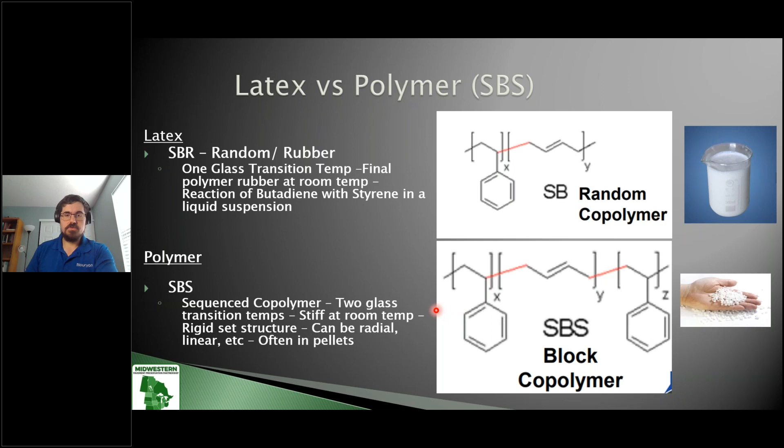But the two different polymer systems do have the same main building blocks. In the polymer-based system, the difference is the styrene-butadiene-styrene is in some sort of a sequenced rotation. While this comes out as a rubbery aspect in final situations and is a liquid when we're processing it, this comes out into more of a solid, styrofoamy little pellet with actually two different glass transition temperatures. So these are different products.

But first, talking just at a high level, how do we get SBS polymer, this solid little pellet, into asphalt in the first place? And this applies not just to asphalt emulsion for chip seal, this also applies to hot mix binders and situations. So we've got this solid material here, we've got asphalt binder.

Theoretically, given enough time, it will be digested into the asphalt, but we really need typically to use a mill that kind of grinds that polymer into the asphalt binder to get to a situation that you like. So these are two slides just from a mill manufacturer.

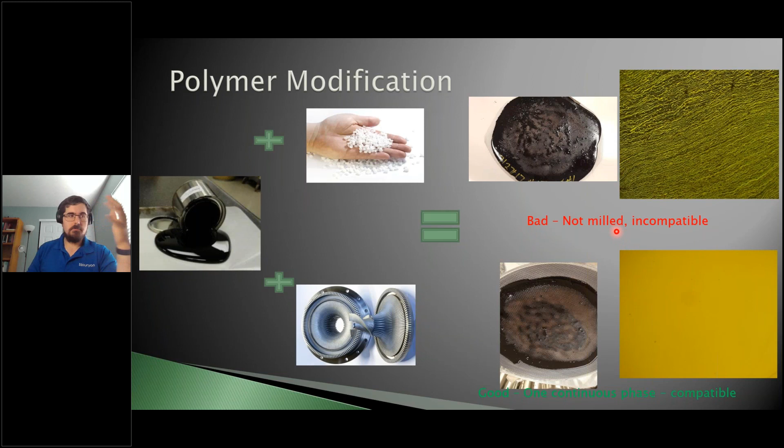This is a common screening tool, just to put the material through a screen. And you're seeing chunks there, and you're seeing a situation here where it's not fully dispersed into one phase. So this is really what we're looking for - we're looking for that polymer to be fully dispersed within that asphalt, so it's one continuous phase of polymer linked with asphalt binder to give you one solid system.

So just touching a little bit on what asphalt emulsions are and how they're produced. A similar mill kind of concept, but you take asphalt binder or bitumen, according to this, and you mix it with some kind of soap solution. Now that soap solution would have an emulsifier, which is something we work in, maybe an acid, maybe a base, maybe some other chemistries. Those all come in line and get emulsified. Those asphalts get turned into small droplets, and that gets turned into an asphalt emulsion.

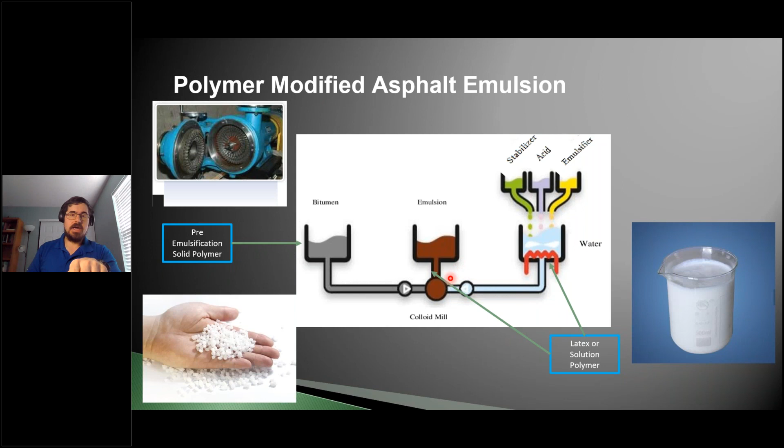And in the case of pre-modified or SBS modified, nothing really changes on the general schematic of how that's made - this asphalt binder is just a different system. But in the case of latex modification of the finished emulsion, this is another liquid, a water-based polymer dispersed system. So this can be introduced in a number of different locations within the system, but it is compatible with water. It's typically introduced into the soap line or even into the soap tank, and it mixes well in and really doesn't add a ton of changes to temperatures and everything like that, like we'll get into.

So what does it look like when we have this latex modified system? Well, in the end, it's a mix of two different dispersions. You have these asphalt particles that were milled up by that asphalt emulsion mill, and then you have these latex SBR particles - those styrenes and butadienes in here. And these are two different systems mixed together.

Now there's some different methods on how you can do that. You can do it in the soap, like I said, or you can co-mill it in various different ways, or you can post-add the latex and mix it all together. There's all kinds of different polymers - SBR, as we touched on in the beginning, is the most common. Natural latex existed at some point, and neoprenes are out there too.

Generally speaking, and we'll get into this a little bit more, you're going to have a lower asphalt viscosity compared to SBS, whereas SBS is going to increase the viscosity of your asphalt in general, and the latex will also have an impact on the rheological properties of the finished emulsion. But what's most important to understand here: the polymers we're talking about, these styrene butadiene polymers, are in the water phase, not the oil phase. These are two separate systems combined together, and then you get your end properties once everything breaks and you get your final chip seal.

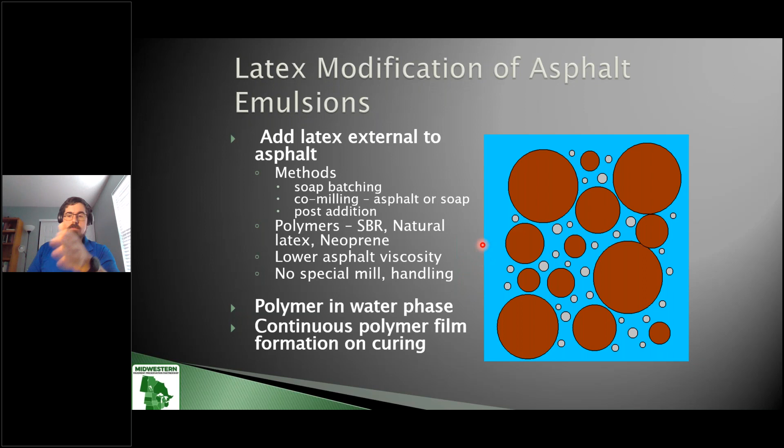On the polymer modified system, these are just the same as any other asphalt emulsion system. You've got all the droplets of asphalt, but within those you have these links of styrene butadiene styrene copolymers within the asphalt droplets themselves. So the asphalt binder was pre-modified with polymer, so the polymer exists in the oil phase, or the asphalt phase.

Due to this, you get a higher viscosity or shear resistance going into the asphalt emulsion mill. This binder becomes more difficult to emulsify compared to a standard binder used with the latex system. Not always, but sometimes this requires you to exceed the boiling point to make a high quality asphalt emulsion with these systems. That could lead to an exit temperature above 100 degrees and the need to use heat exchangers and back pressure and everything like that.

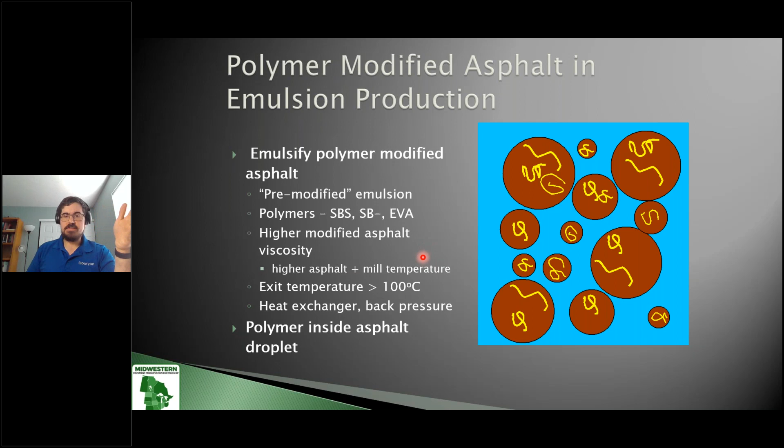So this adds a complication. The overall schematic is the same, but it adds a complication in terms of it being a more difficult material to mill. Whereas if you introduce latex, the material that you're milling when it comes to asphalt is the same as it would be for a CRS2 or any standard emulsion.

There are some different options on how you add the latex to the asphalt emulsion system. This is probably the most common that I've seen, at least. You've got your typical setup here, and note these temperatures - we're not going to exceed the boiling point, we're just making a regular emulsion here. You've got your soap solution with your emulsifier and everything.

You can batch the latex into the soap tank or add the latex in line to the mill. It's very common to see setups where you have either a tote of latex or a tank of latex, and that's just going in line, maybe through a static mixer, and then it goes to the mill. Basically nothing else changes - you've just got that system of polymers dispersed within your asphalt emulsion when it finishes.

One thing to note is latex does have some salt in the system. So if you made a CRS2 or whatever regular version, changed nothing else, and added latex to the system, your viscosity will go down slightly, but it actually becomes more stabilized. The reason for that is something back in high school chemistry called osmosis - the water will flow based on salt levels, so you kind of shrivel up your asphalt particles a little bit because the water flows out of them.

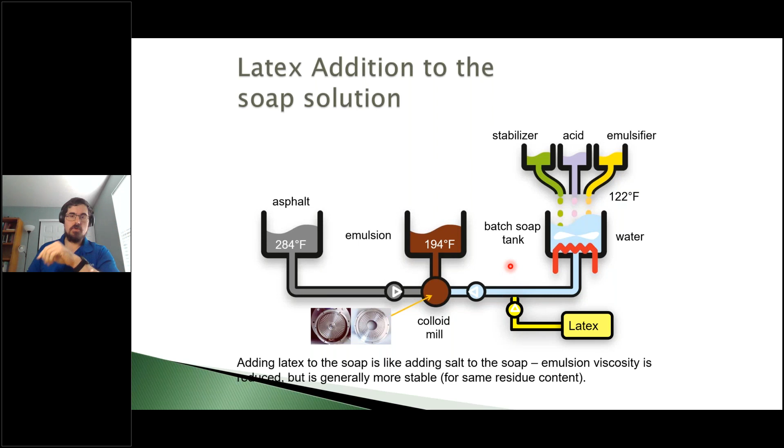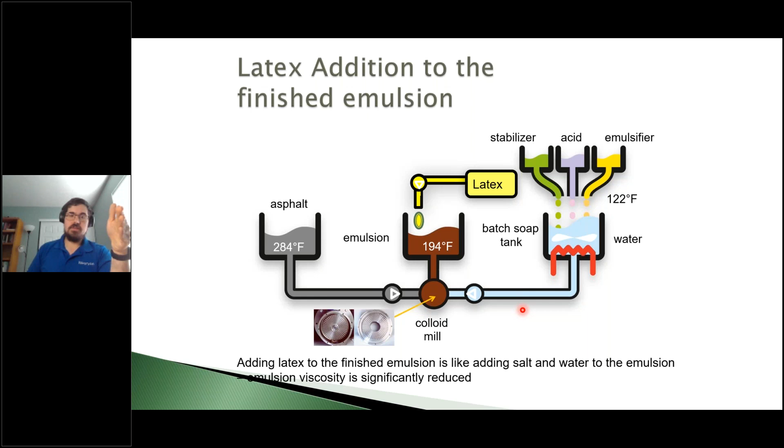Another option - and if you ask Arlis about this, he'll strongly encourage against it, but it does happen - is to post-add the latex to the finished emulsion. You make a finished emulsion, and either in your batch tank or finished tank, you put in some latex. The problem with this, and why this would never be done in a chip seal application, is doing it this way will greatly reduce your viscosity, because that osmosis effect will be more pronounced and more localized as you're able to mix that latex in. You'll lose a ton of viscosity in that situation, and if anybody knows about chip seal, viscosity is very important.

And then the final option is to actually inject the latex into the asphalt line. What that does, and what people have found, is that it will significantly increase your emulsion viscosity. The reason for that is it kind of encapsulates some of that salt water, so it actually swells the asphalt particles slightly to increase your viscosity.

Now, one thing to make sure we understand is the polymers themselves are not going into the asphalt droplets. The polymer is still a separate system - we've still got two different systems. You're not accomplishing that, but you are accomplishing a change in the rheological properties.

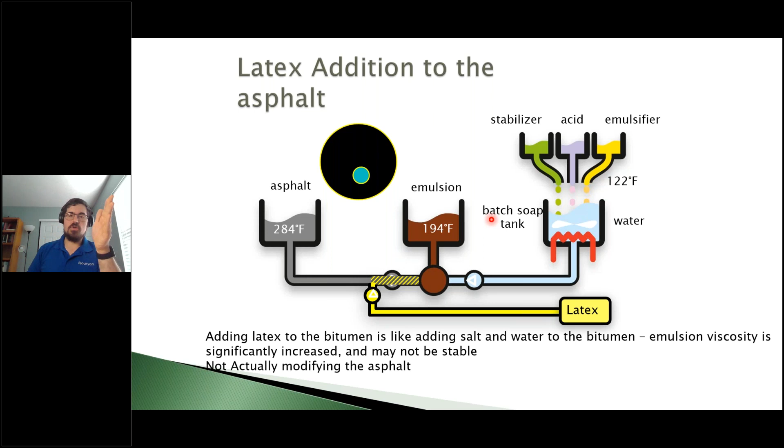So what some people will do is have one line of latex and split it - part into the asphalt line and part into the soap line - as a way to adjust asphalt emulsion viscosity without having to start playing around with emulsifier content or asphalt content. It's an easier lever to use to adjust viscosity, and I've used it in the past in my career. It's easier to change that because if you start changing asphalt content, you're changing your general design of the system, and if you change emulsifier content, you're changing the way everything reacts. So it's an easier way to adjust for viscosity.

So how are these systems tested?

Historically, it's always been, I started off in the lab, and you do the very high temperature asphalt emulsion distillation method. A couple of weeks ago, I actually did a similar kind of presentation in front of some real polymer scientist experts. I said, yeah, sometimes we distill it at 500 degrees Fahrenheit and their eyes got this big. And then I even said, well, sometimes we work on it, we bring it down to like 350 or 400, and they're like, that's still not great.

So some of these testing methodologies are really exceeding the temperatures that these systems ever actually see in the real world. And they're also doing some level of polymer degradation and reaction. But really, the main thing to me, even back in the beginning of my career, I'm like, well, when we do a chip seal, the road never actually gets this hot. So what are we really seeing?

But the goal with the distillation test is to make sure you have all the water out. It's actually difficult to get all the water out of an asphalt emulsion. You can get the initial water out, but some gets encapsulated in the oil. The goal is to get all the water out, all the oil out, measure the oil, and then know that all you have left of that residue is the binder. So it's kind of a way to get that done.

Now, there's been some movement to kind of improve some of those recovery methods lately. And one of those was the vacuum kind of distillation. So you can lower the temperature and use a vacuum to kind of improve the way that performs, but it's kind of cumbersome. You've got to get a whole new piece of equipment, you've got to have something else to work with, and who wants to deal with that?

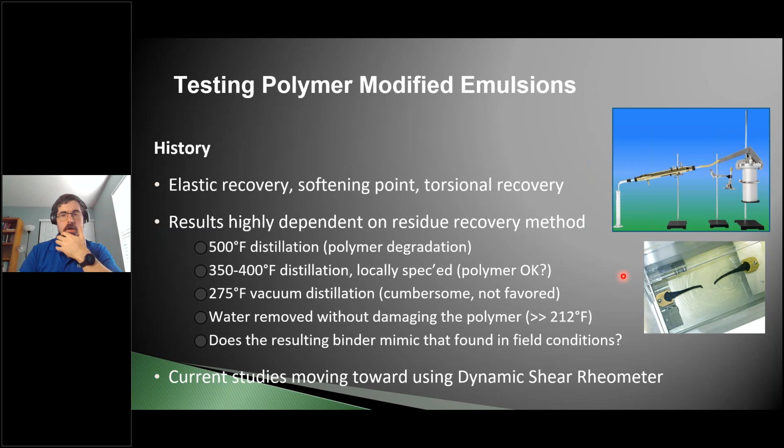And then you have typical pen, softening point, all that kind of stuff too. This is kind of representing where things are moving in the future. So you can just Google NCHRP 9-63. It's been going on for quite a while.

One piece of that is to move to a more realistic residue curing method. And then the other is to start using the dynamic shear rheometer, get some numbers, and they're working to correlate that back to actual field values.

Because one thing I wanted to touch on in the first slide - chip seal is very important to understand, we're talking in the pavement preservation group. This is a preservation treatment. This is not a structural treatment. It's more along the lines of a membrane.

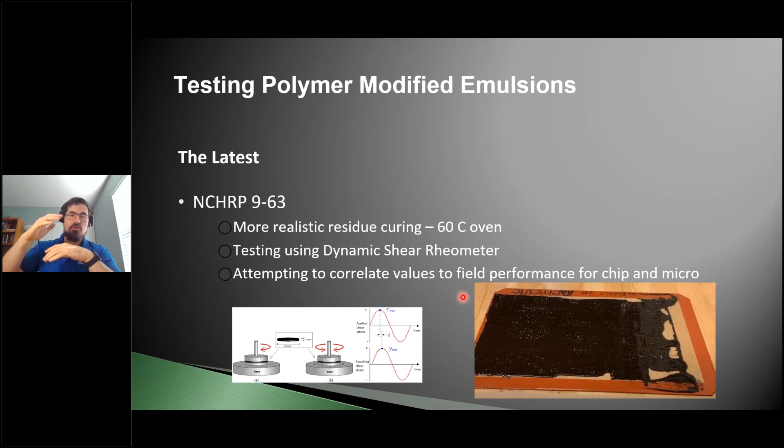And some of this testing historically has been designed more for your real load bearing capacity increasing hot mix. So we've got to be careful on how we analyze these systems. So what does that residue actually look like?

There is a difference in how the residue ends up looking between a polymer modified asphalt system and a latex system. This is how it would look theoretically, just neat asphalt - you just got asphalt rheology. In a latex system, it actually is a membrane of polymer between the asphalt particles. And then in an SBS system, theoretically it coalesces back together and you get back the SBS properties.

Now, what do these polymers do? They improve low temperature fatigue. I think everybody in DOTs knows what polymers do theoretically - they reduce rutting, they improve early strength. But really for chip seal, maybe low temperature fatigue, but we're not really talking about rutting. It's a membrane.

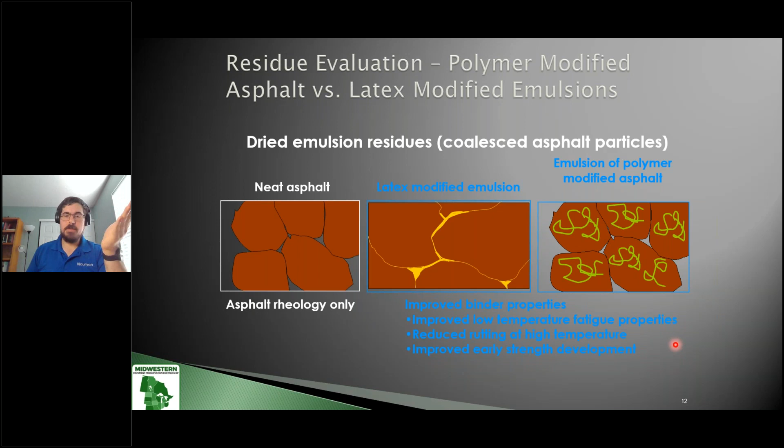So what do polymers do for us in terms of chip seal? I would say the biggest, at least in my career being field QC and different things like that, the biggest failure modality of chip seals is stone loss. And it's been proven, and Arlis is going to get into some of this, that polymers give you that nice little stretch, that additional adhesion, and reduce - assuming your mix design is correct and your application rates are correct - that stone loss.

So we don't get things like this, where all the stone is off and we've just got a slick asphalt surface. The goal is to have some stone and then have that nice membrane to preserve everything underneath it.

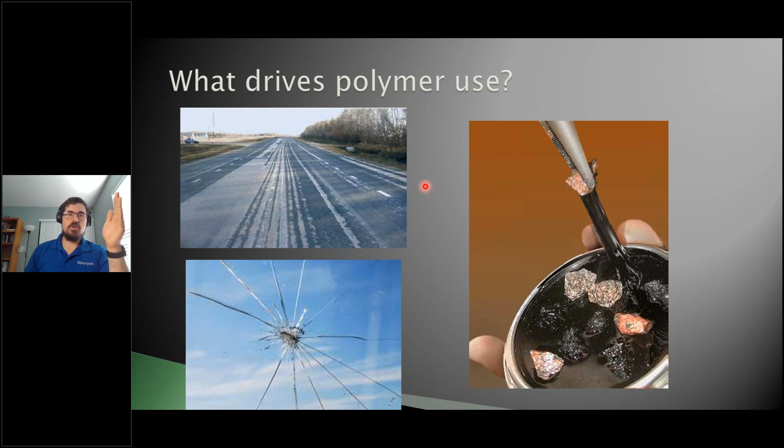There's one way we test that, called the sweep test, ASTM D7000. We take some roofing felt, put some asphalt emulsion or whatever the binding agent is on there, put an appropriate application of rocks on there, and cure it for some amount of time.

This can be used for two different things. You can cure it for different amounts of time and see how it's performing in different curing environments, or you can fully cure it and see how it ends up performing in the end.

So what are you testing with that? You're testing the adhesion. There's some chemistry going into that, the reactivity, how this system clings to the aggregate, the overall durability of the system, and the binder property.

You take this specimen - it's actually like a mixer that goes in a planetary motion, used a lot in micro too. You put a brush over top of it with water, and it rotates around so you see how much stone you lose by beating it up. The less stone you lose, the better your system is.

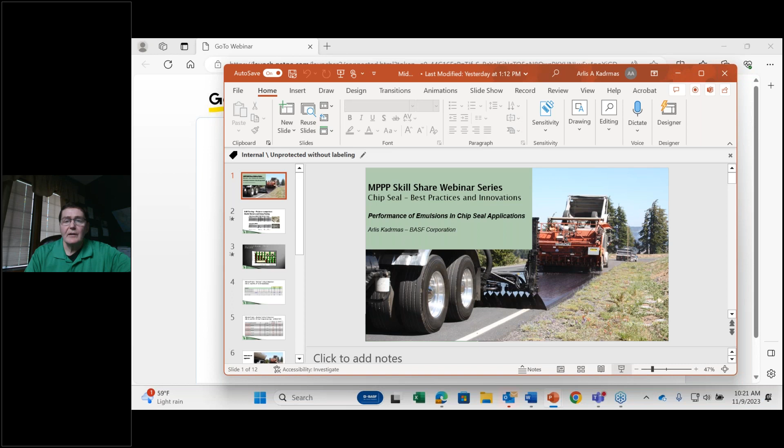I think Aaron introduced the processing and how latex modified versus polymer modified emulsions are made. I want to get into a couple comparisons showing whether you run an SBS modified emulsion as a chip seal or an SBR modified emulsion chip seal - they can both perform very well, be very comparable.

I've got a little bit of data that expands on what Aaron mentioned - just one project done as a trial that compared a latex modified chip seal versus a polymer modified emulsion based chip seal.

To start, I wanted to expand on what Aaron said about elastic recovery. It's one of the tests a lot of agencies use to define whether a polymer's in the system. In this particular elastic recovery test, polymer A happens to be a latex modified system, and polymer B happens to be an SBS, basically a polymer modified asphalt emulsion. When you look at it, one had a little better elastic recovery.

When you look at the sweep testing that Aaron focused on a bit, and showing those results, you can see that even though polymer A had a lower elastic recovery, it held the chips a little bit better with this particular chip and design than polymer B after 2 hours.

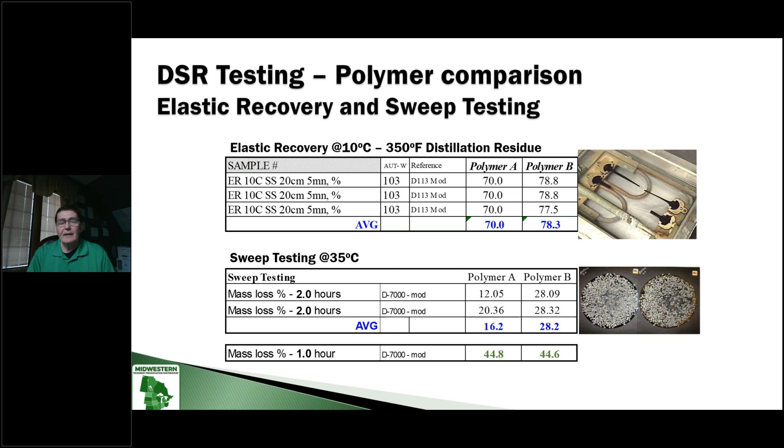And this is just showing how the sweep test can kind of show you how these systems work.

My next slide, I want to get into a comparison using a latex modified system with SBR with 8 different aggregates. This data was done by Paragon Technical Services, so I appreciate them for this information. What this is basically showing is how good polymers can make a system and make it perform better.

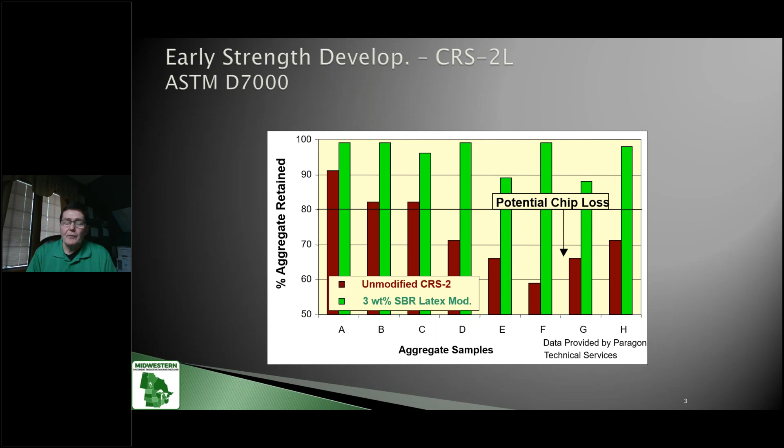Usually on a sweep test, you want to see above 80% chips retained. The first 3 aggregates without polymer modification were slightly above that. Aggregate A actually did fairly well, but all of them with the addition of polymers helped out systems that weren't very good. Samples D through G had right at 70 or so percent retained, but when you added polymers to the system, this just shows, as the slide Aaron showed with the chip loss, that you can get great performance out of these materials by adding polymers to the system.

I want to expand again. This happened to be data from a project where they did both a latex modified and a polymer modified system. Just shows you...

Oops. I think I lost my screen. We're still seeing you fine. Okay. Sorry, I lost my view of the slide.

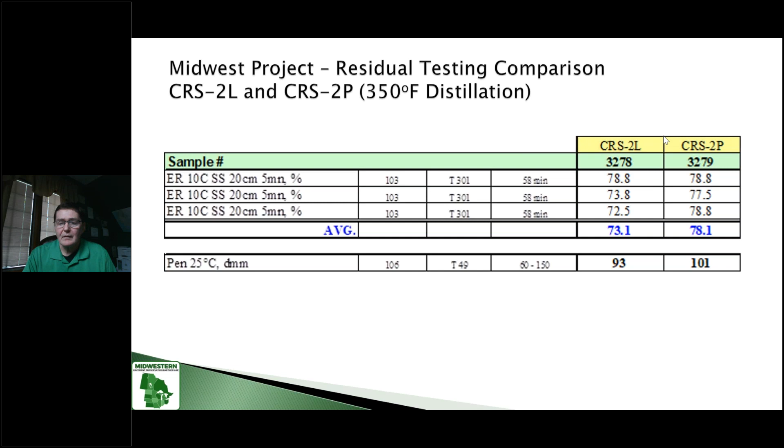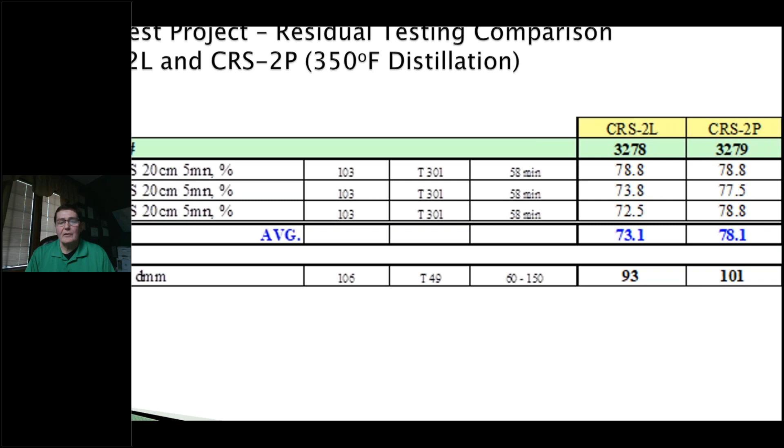Okay, thank you. The elastic recovery on here, this happens to be #2, and you can see that they're very similar results, whether you used a latex modified system or an SBS polymer modified system.

Expanding a little on what Aaron said, how things are moving toward the low temperature evaporation procedure, this just shows the data from the same project where you can see comparable data. As far as G-star, you can see it's a little higher. Almost always the latex modified system will have a little higher phase angle when you do a low temperature evaporation.

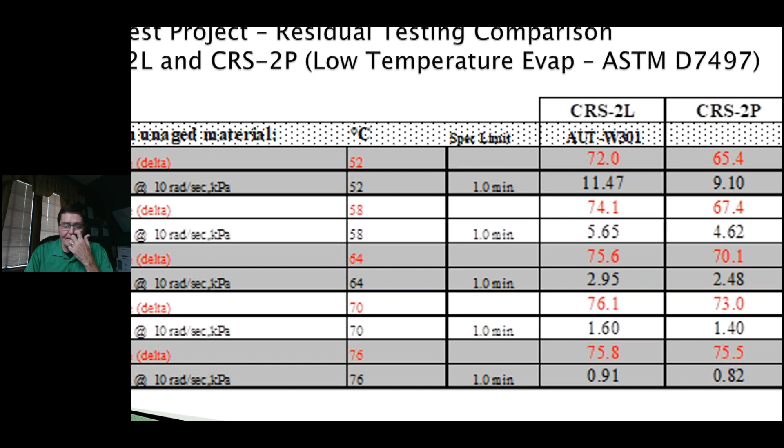That's something that is being looked at in the systems, and when it comes to trying to specify under the low temperature evaporation procedure, they're looking at a lot of different ways of trying to specify around it. But I just wanted to put this slide up there to show you that this is being done, and there is some data going into this process.

I wanted to, lastly, in the few slides I have left, show you an actual field application that was done in Crater Lake, Oregon, where this process was done with both a latex modified and a polymer modified base chip seal emulsion in the field.

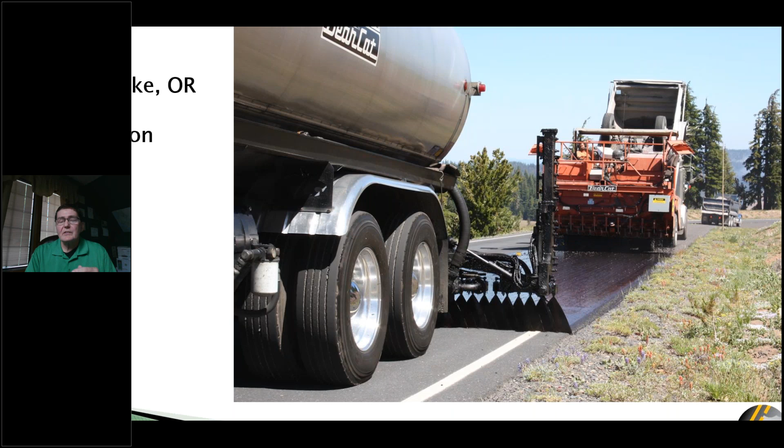This was done by Central Federal Lands, and the project was really done, the reason I've been talking about sweep tests a little bit, to focus on how good the sweep tests could be. I'll expand on that a little bit.

But just on the emulsions that were used on this project, it was obviously done many years ago, and both of these products have been performing very well. The CRS2L, the latex product, you can see some of the data on it.

They ran torsion recovery. Basically, that was kind of how that emulsion was spec'd at the time. It performed very well on that test. The CRS2P, the modified asphalt-based emulsion, had again met the specifications for the project out in the field.

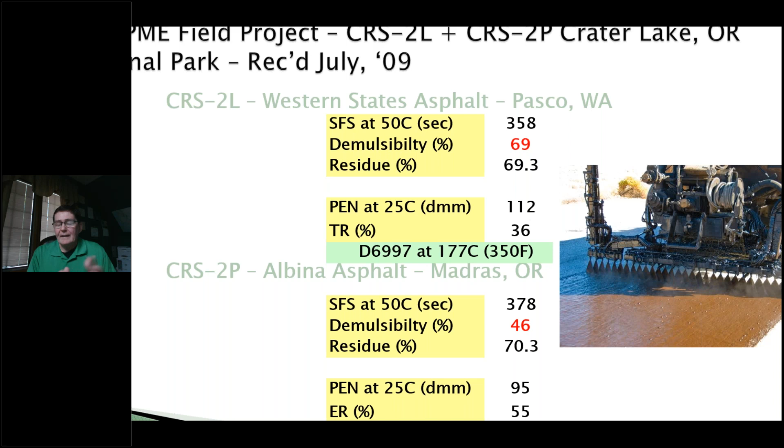And this is just, again, comparisons, expanding a little on what Aaron said. Both of them had about the same viscosity, so you can make the emulsions. The residues are about the same. So again, the emulsions can be made very similar.

Again, the project was done, and the reason this comparison was made is the sweep test was starting to really get looked at in a lot of labs, and they wanted to see whether it could be developed into a procedure that could go into some specifications. So that's basically what this slide is about. There were 4 laboratories involved in some of the analysis behind the sweep testing, just to give some data and information.

This next slide just basically shows some of those sweep test results. And on here, what you'll see is that whether it was a 2L or 2P, if you look lab by lab, the results are very similar. And that's basically what I want to focus on. The results are very similar.

The reason that the sweep test hasn't been kind of grabbed and put into specifications, you can see by this slide. A lot of suppliers are using it in a design process, and it works extremely well. But intralab, if a lab is using this particular procedure, it works very well and they get very consistent results.

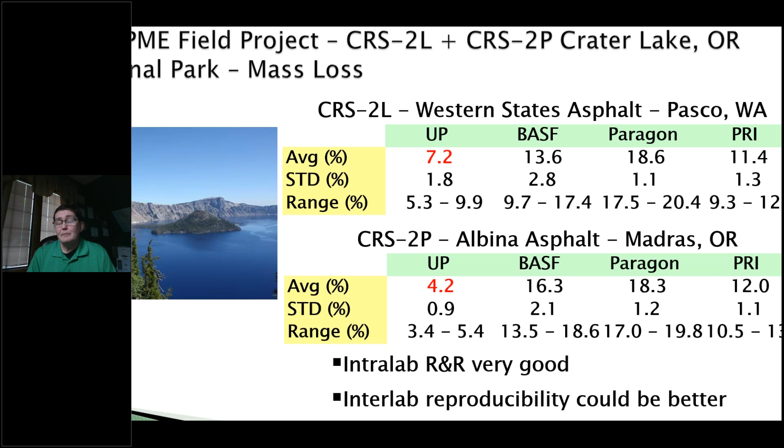But if you look at the interlab reproducibility, it's not very good. You can see the results range from about 4% up to 20%. But what this slide does show you is that the latex modified system and the polymer modified system perform very similarly if you look at the laboratory by laboratory setup.

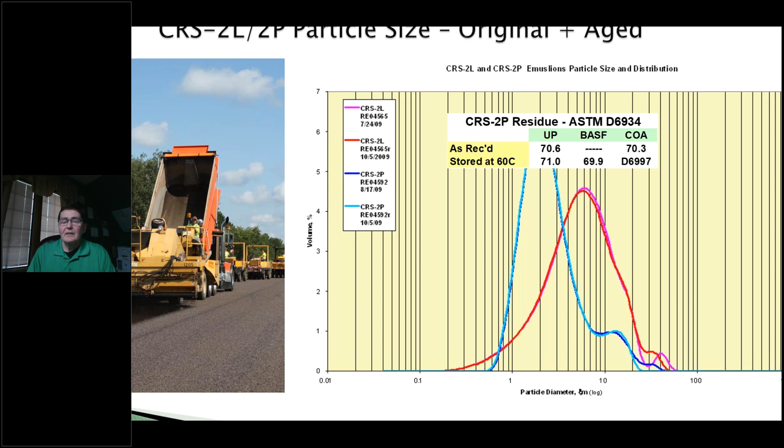This next slide, I just wanted to show you particle size and emulsion. Aaron kind of got into how the production was. Basically, both emulsions, whether latex modified or polymer modified base made into emulsion, give you stable emulsions over a period of time. These results are taken a couple weeks apart, and the particle sizes are basically right on top of one another. So this is just saying that no matter how the emulsions are produced, they're fairly stable over a couple week period of time, which is very important.

In the application itself at Crater Lake, they saw no differences in the performance between the 2L and the 2P, how it shot, how they had to roll it, to seat the aggregates. There were no differences.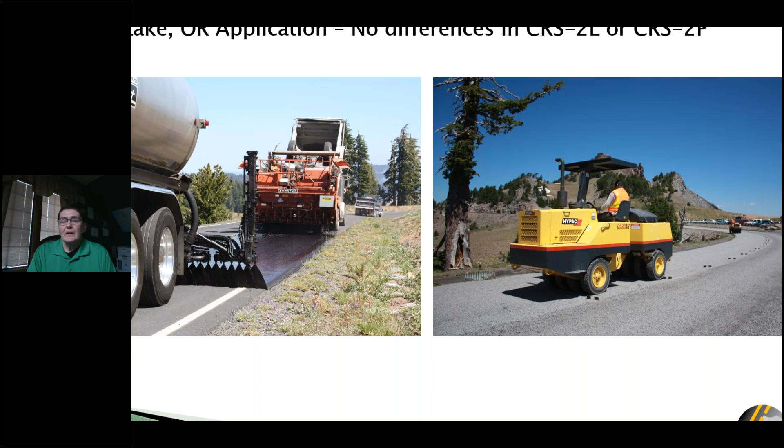And my last slide in the project evaluation, Mike Wolf was a Central Federal Lands person in charge who looked over this. They evaluated this project over a period of years, and it showed no differences in performance at all. So what I wanted to show, and pick out this particular project, is that there are many agencies that use and can spec both CRS2L and CRS2P, and they see no differences. I wanted to focus on one particular project, done in a federal agency area, that showed both of these can produce very good results.

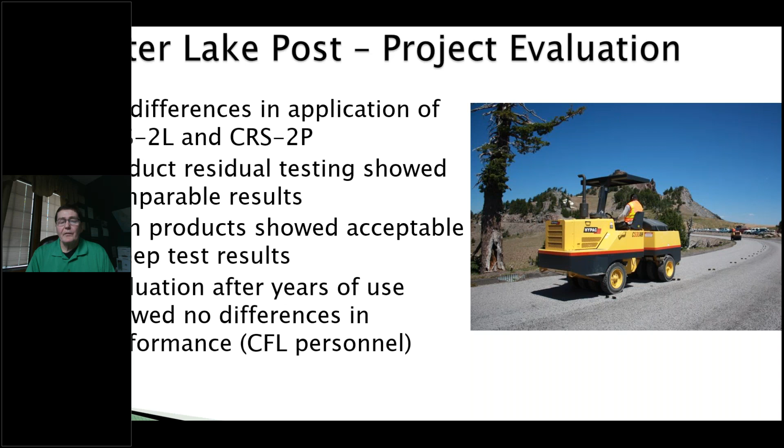So with that, I think I'll turn it back over to the next presenter.

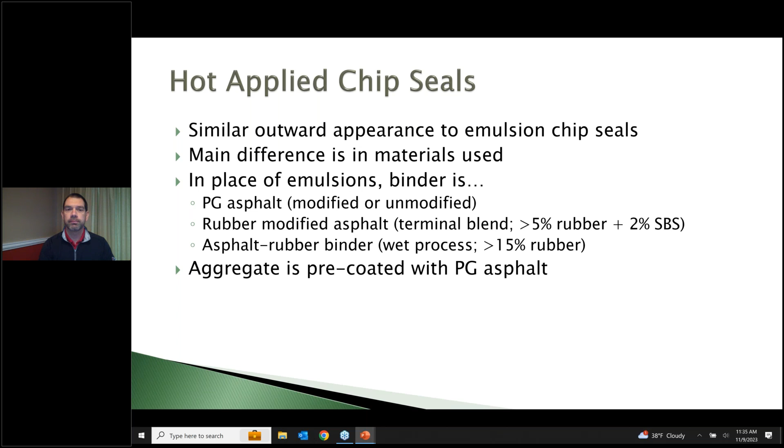As far as specifications, there is a specification out that was published in the interim AASHTO 2022 revisions, section 407, specifically related to hot applied chip seals. Also, the emulsion specifications were updated in that same revision.

For all of these, when it comes to the construction process and what's done out there, again, very similar outward appearance to what you see with the emulsion-based chip seals. So you've got a distributor spraying, you've got the chip spreader applying the aggregate. The rolling application that follows is again very similar.

The big difference when it comes to the hot applied is, in most cases, the sweeping follows immediately behind the rolling operation. A couple of reasons in that regard. The main one being, without the emulsion, without the chemistry and the curing time for the water and the evaporation, hot applied chip seals are a thermal set application.

So essentially similar to hot mix asphalt, where you have a temperature and it really is driven by the temperature. So once that binder cools and everything is there, that chip seal is set. That's what allows that immediate sweeping right behind the rolling operation.

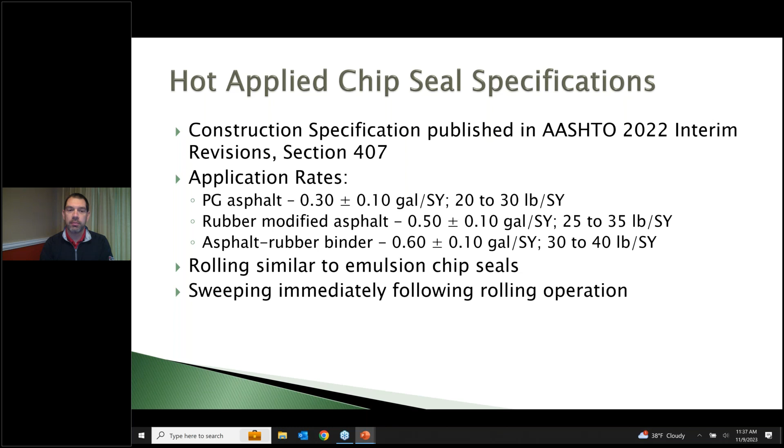So moving now from the hot apply to the high level, the rest of my presentation is really going to focus on that third option there, that third binder, the asphalt rubber binder, the wet process as it is called.

So when we talk about asphalt rubber and why you're using asphalt rubber, this actually pertains not just to chip seals, but also to why use asphalt rubber in hot mix or in other binders in general for different paving applications. You can see there are many benefits that come through, and it really relates to getting into a lot of the chemistry that's involved and what it allows in terms of increase in performance and increase in the ruggedness of that binder that's out there.

We're based up in the Northeast, do a lot of work in the Northeast in cold weather climates, and when you look at freeze thaw and flexibility and those types of issues with chip seals, the asphalt rubber really does beef up that binder and the performance of that chip.

With that, you're getting your longer service life, and as a result, your equivalent annual cost and the performance start to become more beneficial as well. It also allows you to stretch placing the treatment onto more demanding situations, higher traffic counts, and along those lines.

And then obviously with the sustainability side, on a typical mile of roadway, 24 feet wide, you're typically using around 1,350 recycled tires in that. So certainly, again, looking from a recycling standpoint, to get that rubber into the chip seal as well is certainly a great thing.

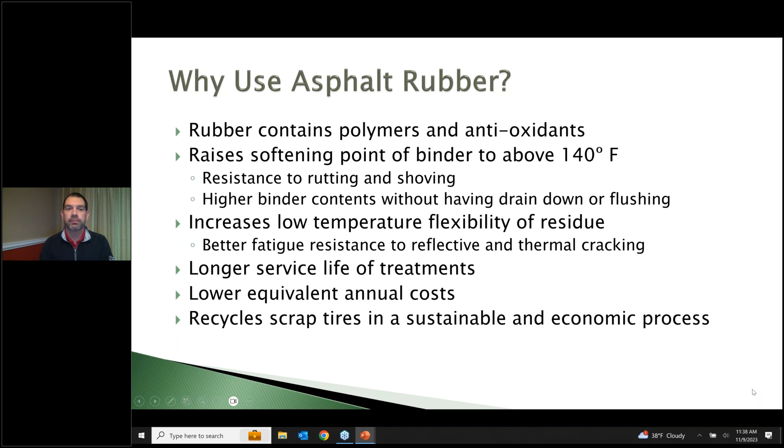Talking a bit about the specification for the binder and the wet process. As I mentioned, it is a blend of a minimum of 15% crumb rubber. This is done according to ASTM D6114. Type 2 is specifically the binder specification for this.

A couple of key points that come off of this specification, as are noted there, really in terms of that blending process. I'll show on the next slide a couple of different options in terms of the blending. But it's a mechanical blending process that is similar but a bit different from blending polymer modified asphalt, in that the asphalt rubber is actually suspended, so it doesn't get fully absorbed or brought into the asphalt, but is actually suspended, and you can actually see the particles, the fine particles, typically a 30 mesh of the crumb rubber that are suspended in there.

But there is a period of time that is required for the heating and the agitation and the reaction process so that you actually get the swelling of those particles. Without that, and without meeting those requirements, the performance really does get impacted. So it's critical to follow that process in terms of the reaction as laid out in 6114. And then from there, continuing along with that heating and agitation once it goes to a job site. So once it's blended, all of your transfer vehicles, all of your distributors all need to have that heating and agitation to allow that asphalt rubber to stay suspended within the asphalt.

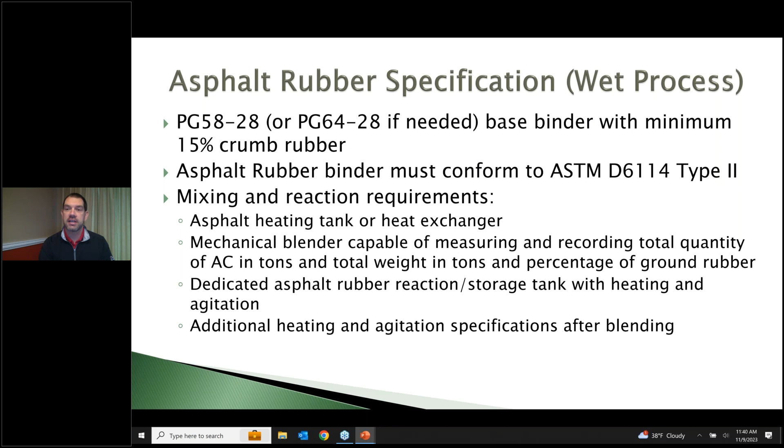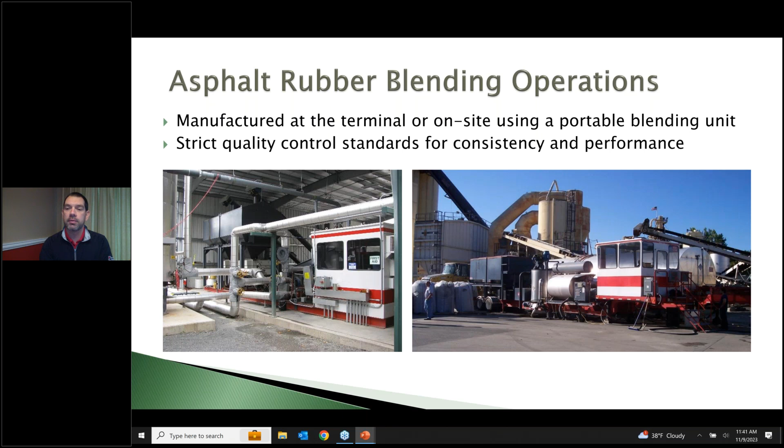Regardless of which process is used, the biggest key is going back to the specifications and that strict quality control, to make sure you're getting the performance out of the materials that you really need. Along those lines, this is a big part of the new specifications through AASHTO, when it comes to really trying to raise the level of our pavement preservation treatments and materials up to the standards of hot mix, and really bring the quality control up with that.

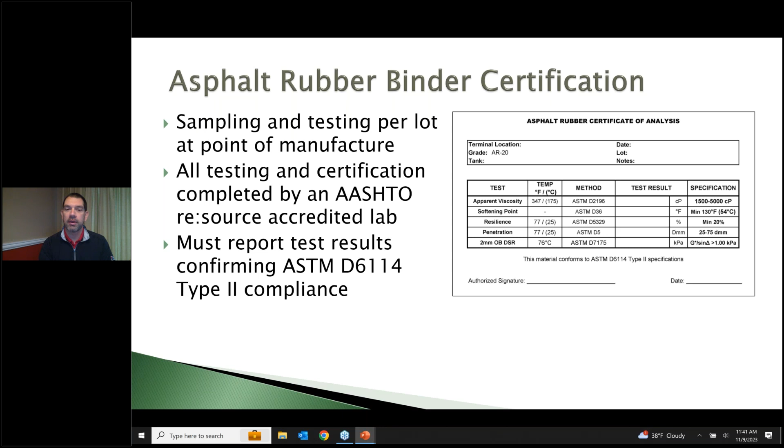All of the asphalt rubber binder goes out with certification. There's sampling and testing done for every lot at the point of manufacture. Everything must meet the requirements for ASTM D6114, certifying that the test results and all specifications are being met. This raises the level, giving us the quality control and quality assurance on the materials, to minimize the variables that we know, so we're really trying to make sure we get the best performance out of our product when we get onto the road.

From a process perspective, as I mentioned earlier, the outward appearance is very similar to what you would see with an emulsion-based chip seal. Surface prep and cleaning, as always, for pavement preservation treatments is critical. In the case of hot applied chip seals in general, and certainly with asphalt rubber, a clean and dry surface is critical. So the same way we need clean and dry aggregate, we need to make sure we have a clean and dry surface. Where an emulsion chip seal can get away with a damp surface, you certainly need that dry surface for any hot applied treatment. Otherwise, you really can't get the adhesion down there with a hot binder.

You have a hot spray application, in this case 325 plus, and typically around 0.6 of a gallon. The national specification calls for 0.6 plus or minus 0.1. Then the placement immediately behind, similar to emulsion chip seal, of the cover aggregate, remembering that it is a heated and pre-treated cover aggregate. You have the rolling and the sweeping that will follow, and in the majority of cases, normal traffic operations return within 1 hour. The goal in many cases is to actually never have traffic onto a surface that hasn't already been swept. Not always possible, but that's typically the goal with the hot applied, because you're able to sweep it immediately.

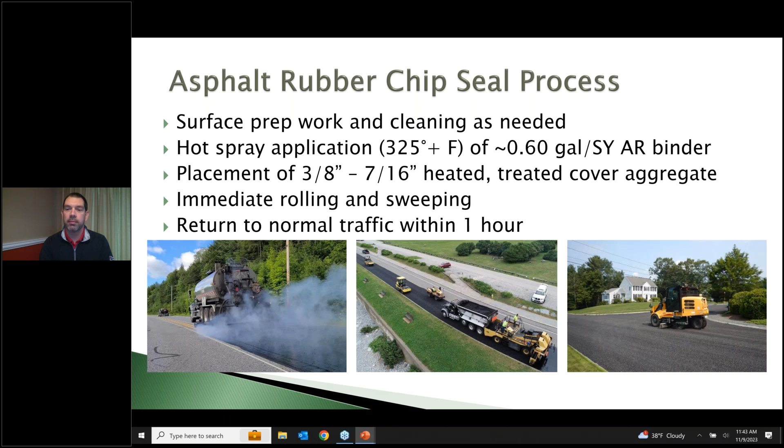This process, because of the flexibility added in, is also used in many cases as an interlayer. Process-wise and material-wise, it's placed exactly the same, except a surface is put over it, typically a hot mix or paved surface. What you get is a thick layer that can really absorb a lot of that reflective cracking, and seal and waterproof the surface.

In the case of those two cores on the right-hand side, that was out of Massachusetts, a project where they had an area both with and without the interlayer. These cores were taken 2 years later. You can see with the one without interlayer, how that crack had reflected back up through. With the core on the right-hand side, where the rubber chip seal was used as the interlayer, that has really absorbed the cracking and the reflection coming up through, and has deterred and delayed that reflective cracking coming up through the surface layer.

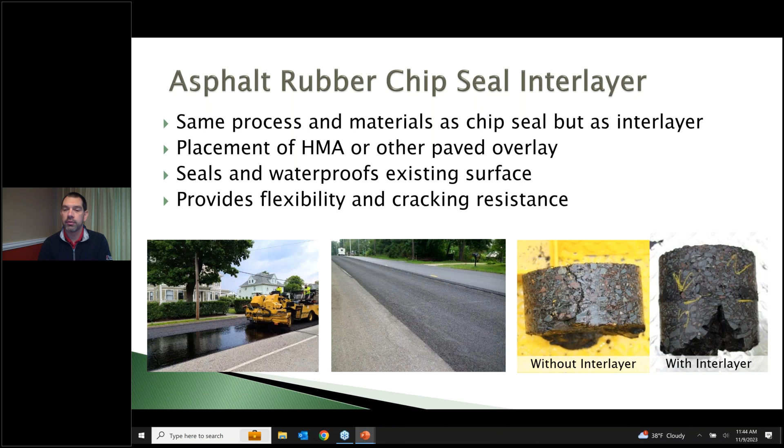Just to show a couple of completed projects and what they typically look like. With the heated and treated aggregate, you do get a much darker surface, especially immediately with the application, because of that coating on the stone.

So it provides that higher contrast when a stripe goes out. And there's also a certain degree of perception with the driving public of being on a darker surface road, as opposed to the untreated aggregate, whatever the color is, whether it be the gray or the lighter. These are three examples of DOT projects on mid to higher volume roadways.

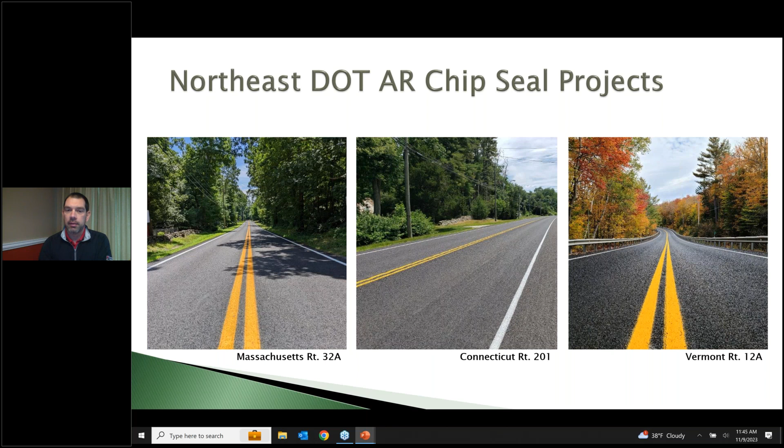On the municipal side, again, a couple of examples: more of a rural setting on the left-hand side in New Hampshire, Newport, Rhode Island right along the ocean, and then Arlington, just outside of the Metro Boston area in more of an urban setting. So placement of the application in a variety of different situations and road conditions and types.

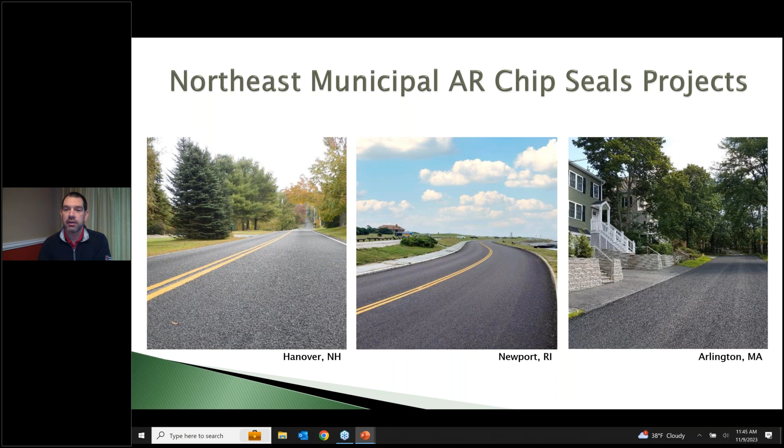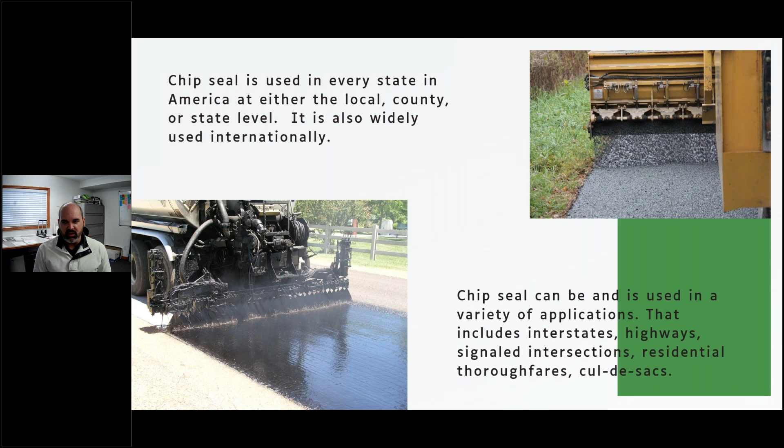So what I wanted to get into are the characteristics of a quality chip seal. The first step in the process is site selection. The first step in creating a successful chip seal project is selecting the right road. We hear that all the time with pavement preservation: right road, right time. Chip seal can be placed virtually anywhere, but will only be as good as the road it is placed on.

The second important characteristic of a quality chip seal is mix design. A successful chip seal requires correct materials placed at the correct rates. The design process should include a site visit to evaluate existing site conditions and analysis of specified materials.

And the last and final characteristic is equipment calibration. Equipment needs to be calibrated to the mix design, and that mix design is a starting position for every application. Field conditions need to be verified to check against the site design.

Touching back to site selection quickly - like I said, you can place it anywhere, but that doesn't mean you should. It's an important step in the process to make sure that you're placing any pavement preservation treatment at the right time. And the mix design is what's going to determine what level, what quantity of materials are placed, and at what rates.

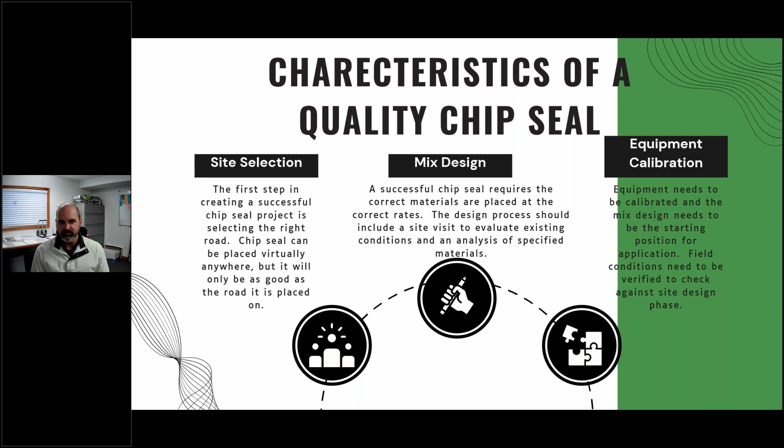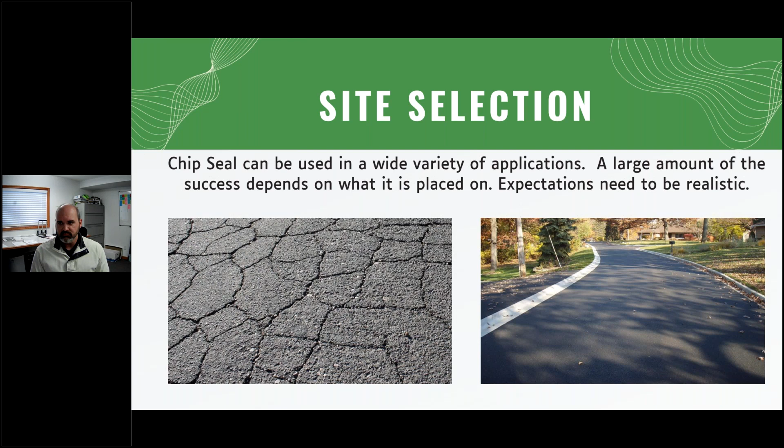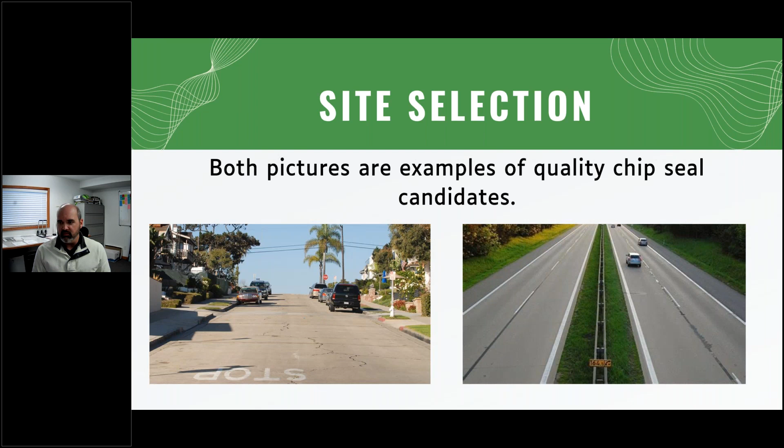Picture on the right, as I said before, both Missouri and Kansas have chip seal on their interstate systems. And so it can be done, and it can be done successfully. There may be a few extra steps that need to be taken to make sure that you're getting what you need out of that chip seal.

If it's a 24-foot wide chipper, you're going to have to do that 8 times, and adjustments need to be made if you're not hitting the target you're supposed to be hitting with that chipper. You wouldn't want a situation where the right side is laying heavier than the left side, or there's a couple gates in the middle that aren't quite opening all the way, and you're not getting out what you need to get out. All those things are going to inhibit success in a chip seal application.

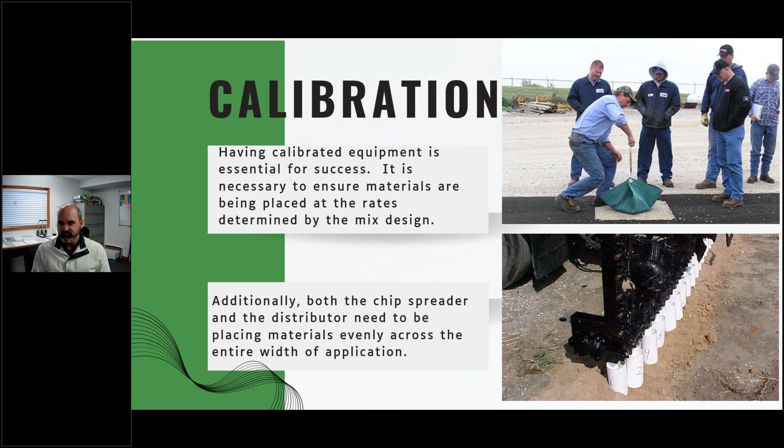So the key features of mix design are the materials being used. The beginning place and core of every mix design is the median particle size of the aggregate. The binder rates are established to achieve 60 to 70% embedment of the aggregate initially. This can be a bit of a back and forth, in that you can start with the idea that we want to use aggregate A, and given that aggregate, the mix design will give you a binder rate. You may look at that and think the binder rate seems too small for what we're applying, that you want a heavier coat, something along those lines. At that point, you would want to go look at potentially a larger aggregate, something that's going to have a larger binder rate with it.

And then the surface condition. The relative amount of cracks and porousness of the existing road determine the rate of binder. For example, if you are applying a chip seal over an existing chip seal road, something that was done a couple, 3, 4 years ago, you need to know that road is not going to absorb any of that emulsion or extremely little of that emulsion or hot rubber asphalt. It's going to reflect. So that's your mix design, it needs to be input into that, so it decreases the amount of binder you're applying. If not, you're going to end up with a flush surface, something where the aggregate displaces the asphalt binder. The asphalt binder goes to the top, and you end up with that black flush, especially in the wheel path, something that is slick, doesn't have any friction on it, and can be extremely dangerous to the public.

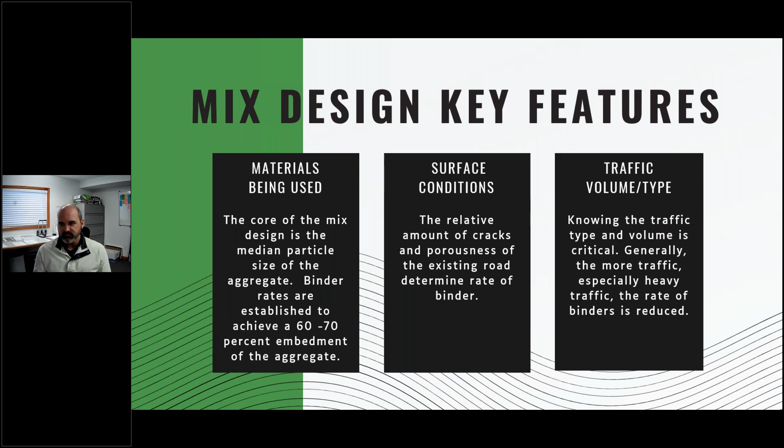And I really didn't have a whole lot else besides that. I was hoping that might inspire some questions, and would be happy to take any questions and just kind of see what might be in the chat and what we can discuss further.